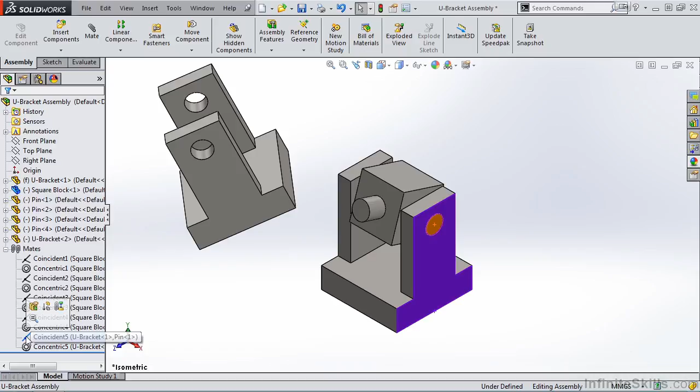If we expand the mates, you will see on the U-bracket we have a coincident mate and a concentric mate. The coincident mate is mating the face of the pin and the face of the U-bracket. Let's suppress the coincident mate.

Once we suppress the coincident mate, the one mate we have remaining is the concentric mate. So if I move the square block, notice we maintain the concentric mate. However, the coincident mate is suppressed.

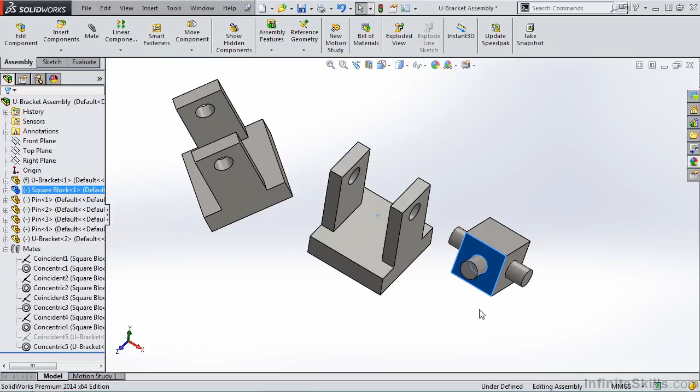Now let's take a look at how to add a width mate. The width mate will allow this square block to stay centered within the legs of the U-bracket.

So let's go back into the mate command, and I am going to clear this window. I will scroll down, select advanced mates, and then select the width mate. You will see we have two windows, the width selections and the tab selections, and you will select two faces for both windows.

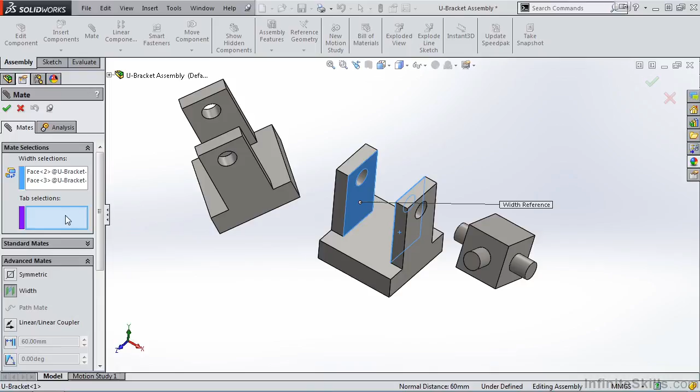So for the width selections, I am going to select the inside faces of the bracket. For the tab selections, I'm going to select the two faces of the square block. And now that square block is centered within the two legs of the U-bracket.

So if the size of the U-bracket expands or something changes on the block, that block will always be centered within the legs of the U-bracket. So let's go ahead and accept it.

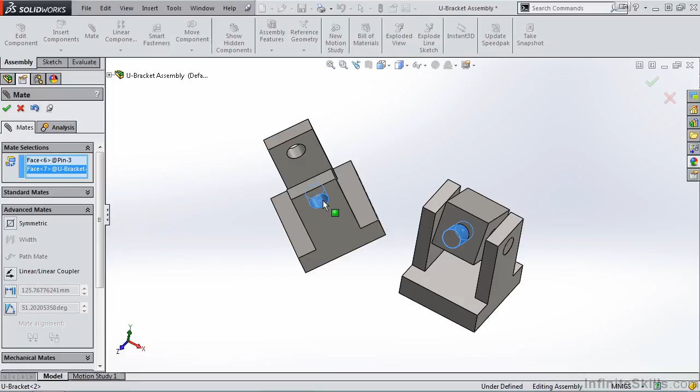And now let's do the same for this upper U-bracket. First, we'll apply a concentric mate. That falls under standard mates. And let's go ahead and flip it.

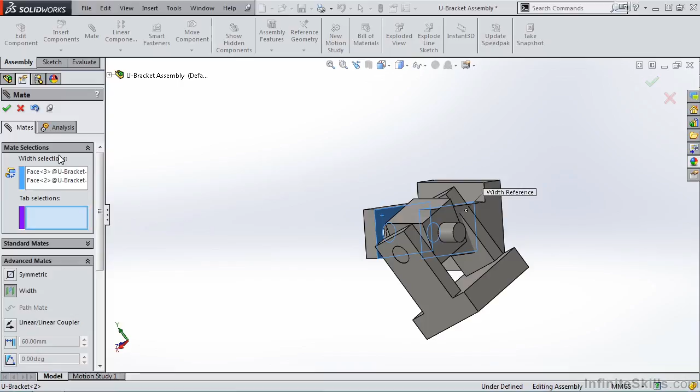There we go. And now we are ready for the advanced mate, which is the width mate. Once again, I am going to select the two faces of the U-bracket for the width selection. And then for the tab, I'm going to select the two faces of the square block.

I will select the green check mark, close out of the mate property manager, and notice the U-bracket is centered around the square block.

Once again, we have a lot of assemblies that require this application. So the width mate, while it's easy to use, it is considered an advanced mate, but it's one of those mates that you should know how to use even in an introductory course.